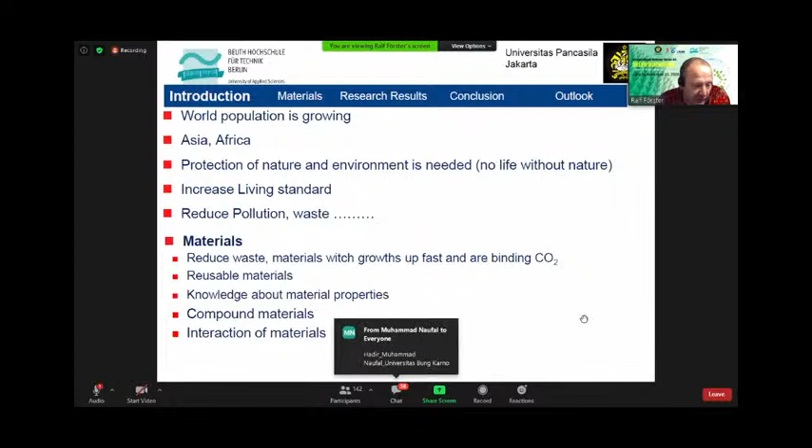So we need other construction materials. We need some alternative building materials, as you know, the sand for mixing concrete to building beton is decreasing. The prices for this material is increasing very fast. One of our alternatives are wood.

In Europe, wood is well known as a material for houses, for devices, and so on. Everybody knows this. In Asia, bamboo is well known as a traditional material with very interesting material properties. But we need some new technologies for using bamboo, like joining technologies and so on. We have investigated in the last year the friction welding process on bamboo and wood too, and I will tell you something about our results and our ideas of new materials.

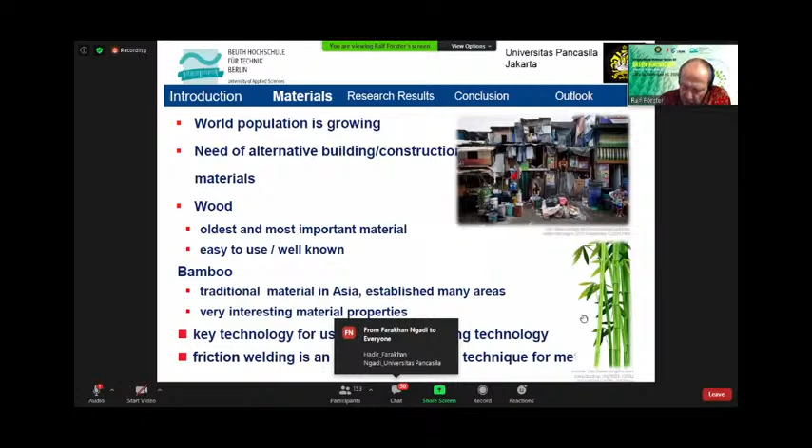Yes, all of you know bamboo much better than the Europeans. The structure of bamboo is similar to wood, and the basic properties are also similar, but bamboo is a member of the grass family. It's not a wood, it's a grass. There is a hard outside and a soft inside. It's very tear resistant fiber strands, and most bamboos are divided by knots, and the tensile strength of the bamboo grass reaches values up to 40 kilonewton per square centimeter.

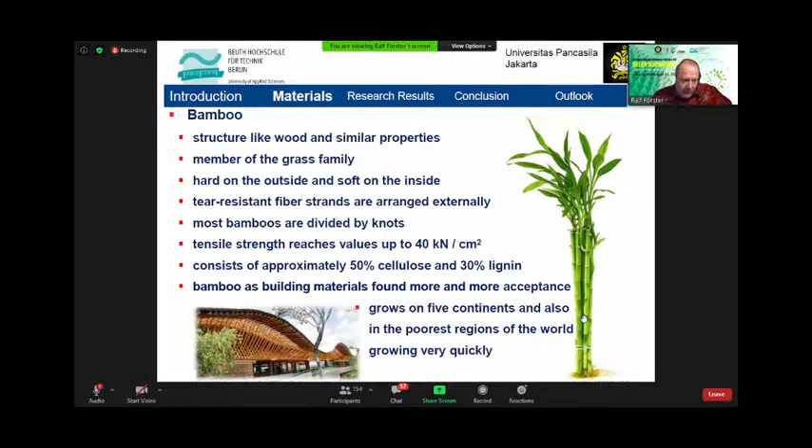The main content of bamboo is cellulose and lignin. This is also similar to wood. Very interesting and very important for the connection of bamboo with the friction welding process is the content of lignin. The lignin content in the bamboo plant is similar to wood, and that's why we can use the experience in friction welding of bamboo also for the friction welding of wood.

So here are different pictures, cross-sections of bamboo, of different bamboo types. You know, there are a lot of different types and a lot of variety of bamboo. Here are the knots. It's a cross-section of a bamboo stem with the knots and the hard outside and the empty inside with very stiff knots.

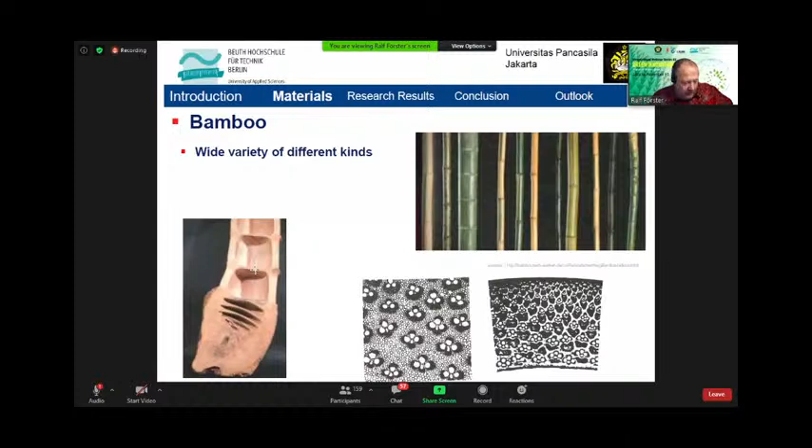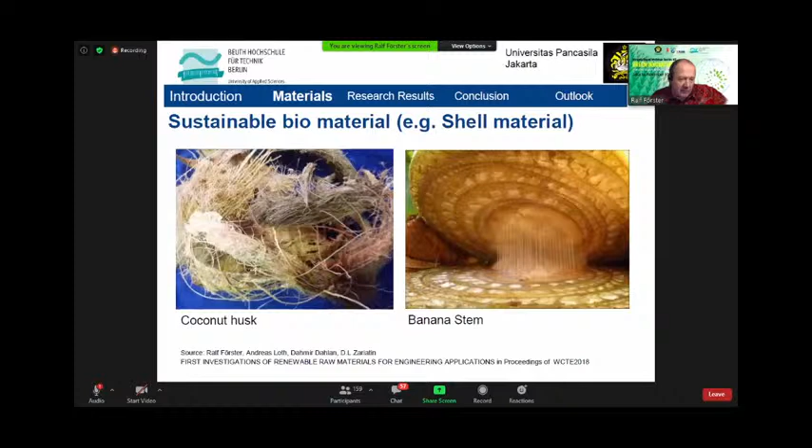So what are other sustainable, very interesting biomaterials like coconut husk, banana stem, banana ropes, palm tree fibers? Those are biofibers. These are very interesting for the next step, for outside material of sandwich materials, lightweight sandwich materials, like hemp fibers, linen fibers, and so on. There are a lot of ideas and opportunities to use such materials from a bamboo system.

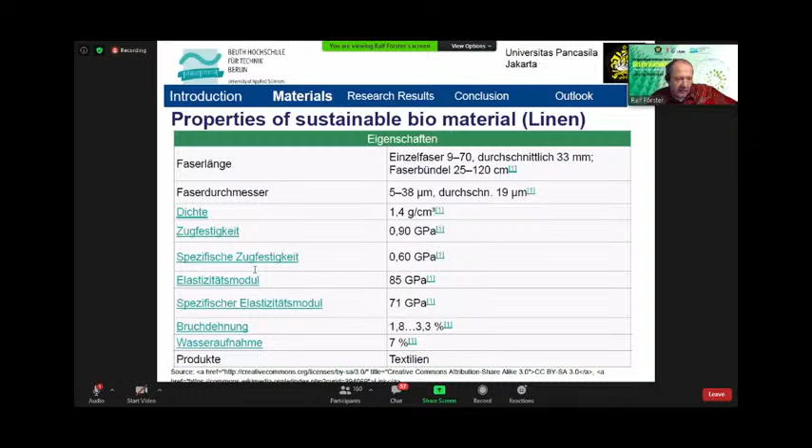We have some properties of such sustainable materials like linen, also for hemp. These are very often used in Germany or in Europe for ropes, for clothes, for pillows, and so on. But there are not so many applications with a technical background, with an industrial background. But the advantage of the biomaterials is that after using, at the end of use, there is no hazardous waste. They have no negative influence on the environment, and we can use it independent of

our Earth. So, but we don't have such standard values. We don't know the properties of the Asian biomaterials, like banana trees, like coconut fibers, and so on. And that's why we have to do a lot of research with these materials.

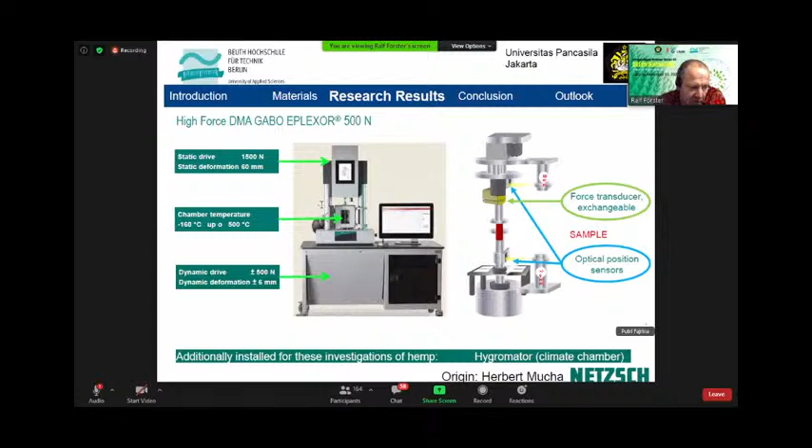Depending on the temperature, depending on the water content of our material, we can do a lot for collecting the basic knowledge about the behavior of our biomaterials for new applications. Here are some tests which we have carried out with hemp fiber. We have a constant temperature of 24 degrees and a constant humidity of 20%, and with a time sweep which increased stepwise the humidity.

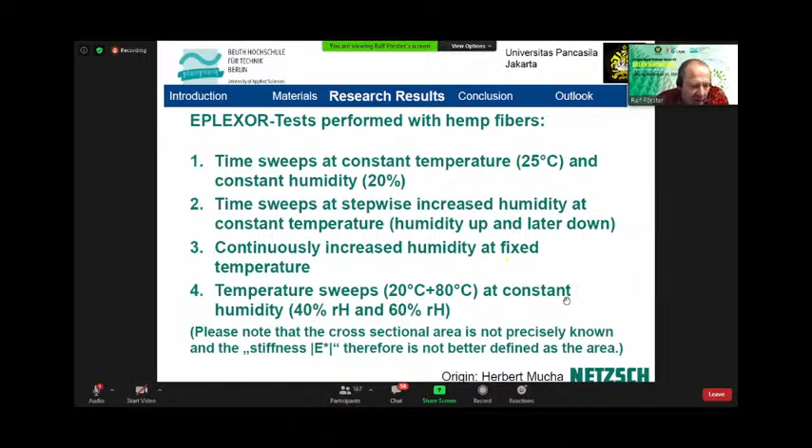The temperature sweeps between 20 and 80 degrees at two constant humidity values of 40% humidity and 60% humidity. So that we can collect first data with hemp fibers. Actually, we are trying to install new clamping systems for measuring really single fibers, very thin single fibers of our material, and we have seen how the behavior is changing over time.

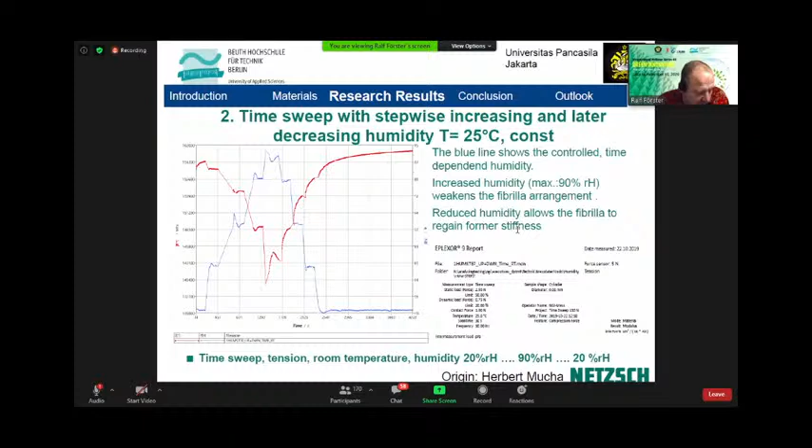Here are also some results with different humidity values and what happens with the stiffness of our material.

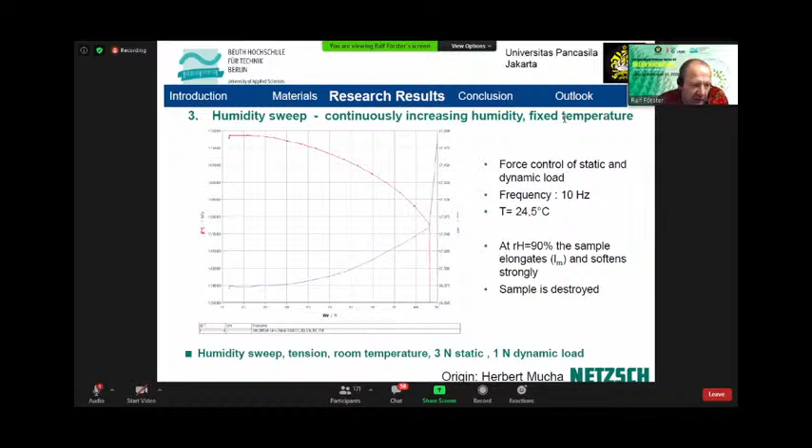Here are some other results about tension, depending on different static and dynamic loads at a fixed temperature and with continuously increasing humidity.

Here are some other results, also from one single hemp fiber. For the future we must collect much more values for different materials.

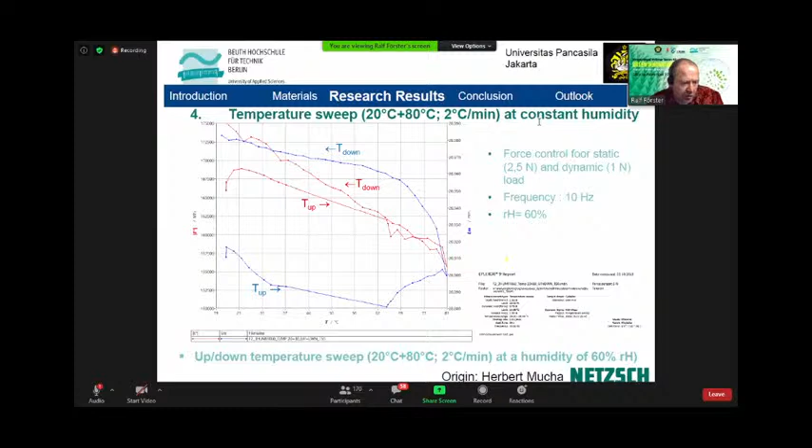And with different testing environmental conditions. What is a main problem of our research is the connection. Here are some traditional connection systems of bamboo and wood.

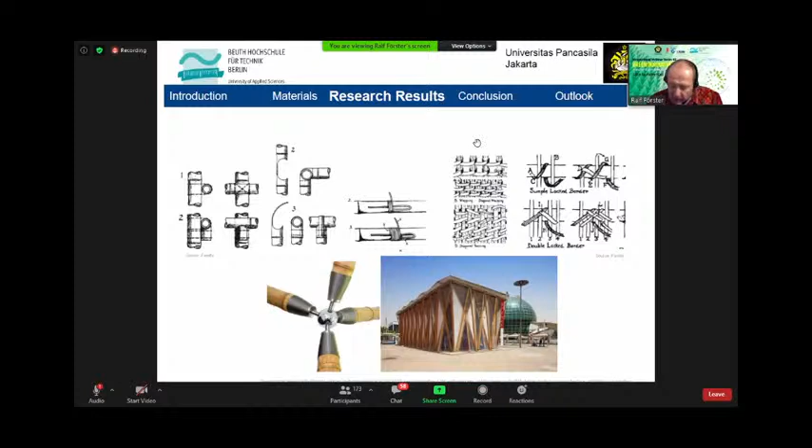We can join this with some ropes, with seals. We have metallic joinings. We can connect it with some bands, like fibers, like thicker fibers and so on.

But the demands for joining technologies are: this connection should be free of chemical glue, it should be sustainable, we don't want hazardous waste, and the connection should be reproducible.

Then one of our cylinders is fixed and the other part of our sample is turning, and with a high pressure force, temperature is increasing.

We can reach the melting point, and we can get a very stiff connection between these two parts.

After turning, we don't see any differences in our surface, and we have a very nice cylinder, a very nice shaft. This is a standard technology for friction welding.

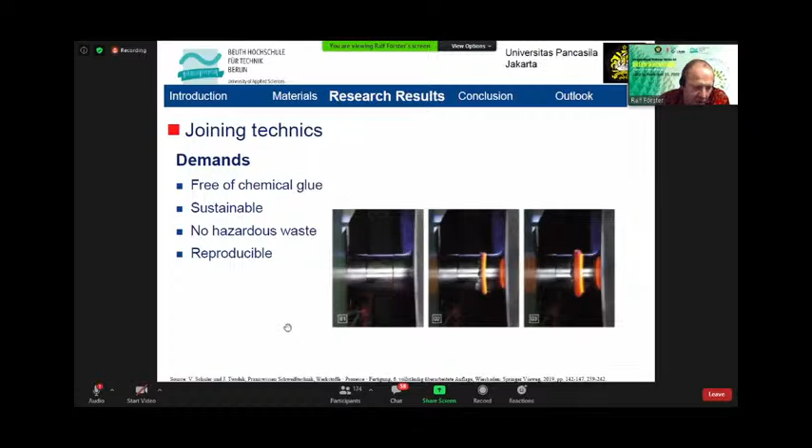Yes, it is. As you know, the Germans like it to make tables, to make standards and so on, and also the friction welding process has its own standard.

We have the welding through movement. This means there is no external heat, there is no flame, no plasma, nothing.

We have an ultrasonic welding, with some sonotrodes in this ultrasonic welding. This is very often used in the electronic industry, the semiconductor industry, like ball bonding.

Like ultrasonic bonding, if you want to connect the very thin wire of integrated circuits with the outside plating. This ultrasonic welding is used, I guess, in 99% of all joining processes in the semiconductor industry.

We also have an ultrasonic welding process in the packaging system, if we cover some very sensitive electronic devices with some sheets of plastics and so on.

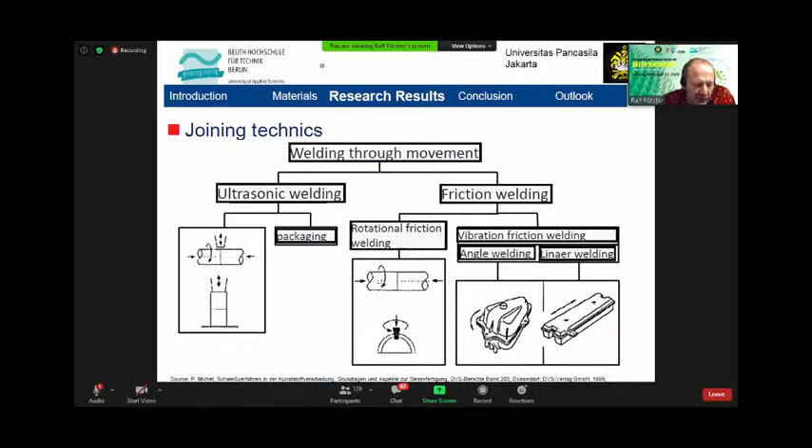Okay, and this is what we are doing. We have one fixed part and the other rotated part with a pressure force for the connection.

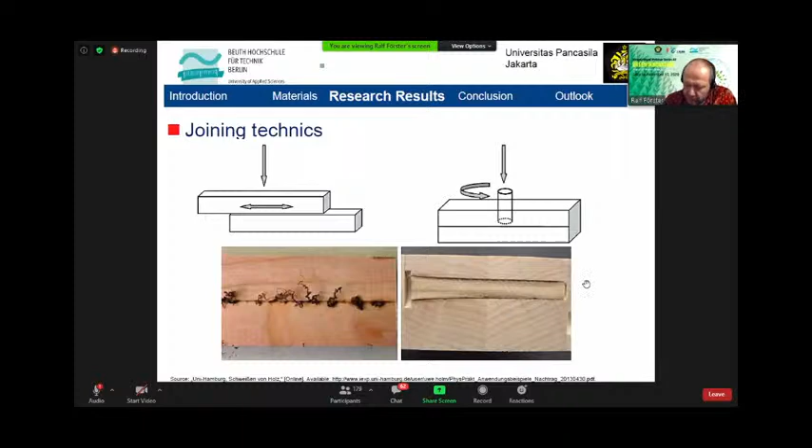What can we see when we have a cross section and look inside our friction welding zone? We have a compacted cell structure on the top, and down we have also a compacted cell structure, and in the middle, where our connection is, we have pyrolyzed mass.

That means it's a mixture of carbon and lignin, which is used as a natural glue, something like that. After high temperature without burning, we have a natural, sustainable glue, used for the connection of our different wood or bamboo types.

Some advantages of friction welding of wood and bamboo are: the connection can be established quickly within a few seconds, we don't use any additives, and we can combine different wood and bamboo materials.

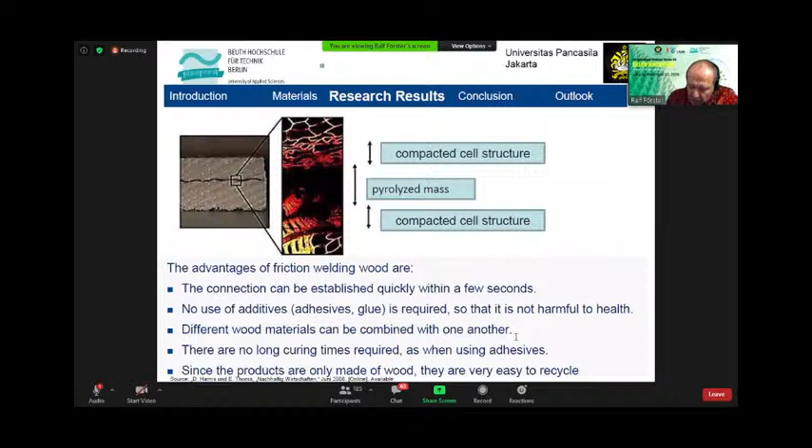We don't have any curing times compared to some used glues. And the complete product is only made of wood or bamboo without any additional materials, and that's why it's really easy to recycle. We can put it on the earth and wait some years, and we have earth again, or we can take it to a fire and eat some satay or whatever. We can use it like standard wood products, without any influence on our environment.

Two years ago, I showed you our first initial test. In 2018, we tested pine and beech with our standard turning machine. I hope you remember what we have done. I will show you our first videos about this. I hope you can see the video.

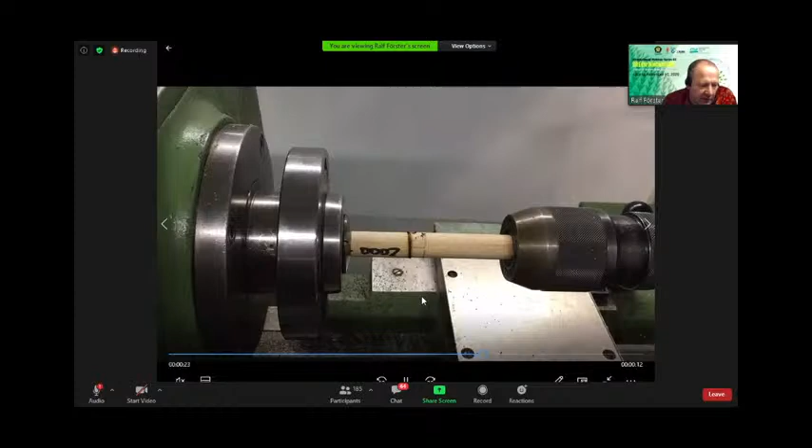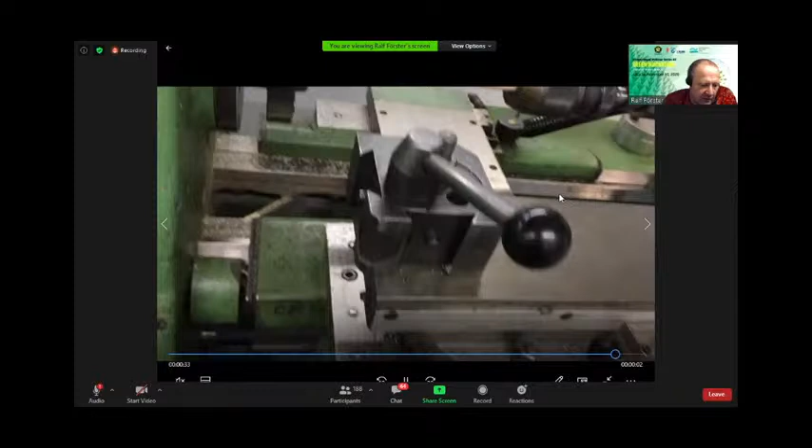Yes, we can see, Professor. Okay, that's great. That was our first test equipment, a standard turning machine. It was very easy to use. It was a fast start, but the first steps were really successful.

So this was the wood video. Here is the same procedure, same process with bamboo in a lathe.

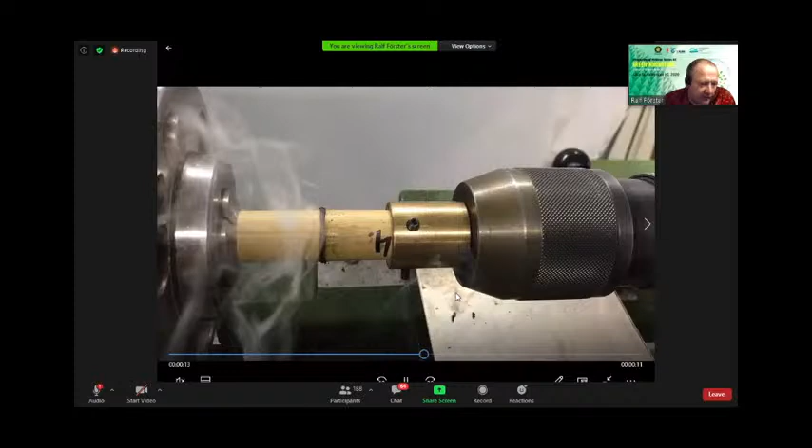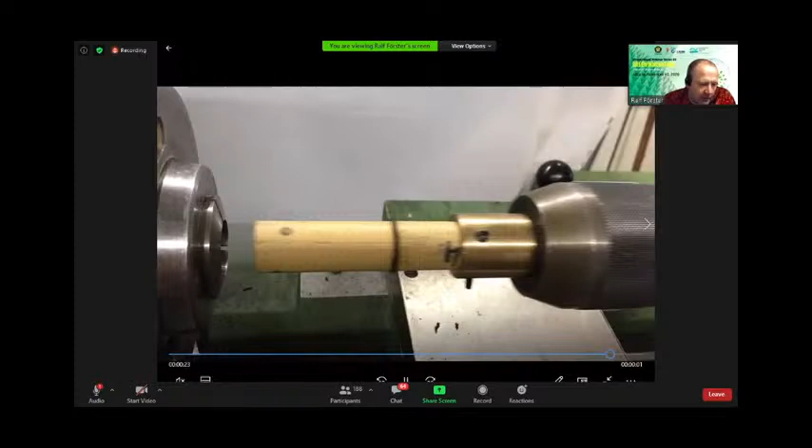We need a special clamping system for the bamboo material, but it works very well.

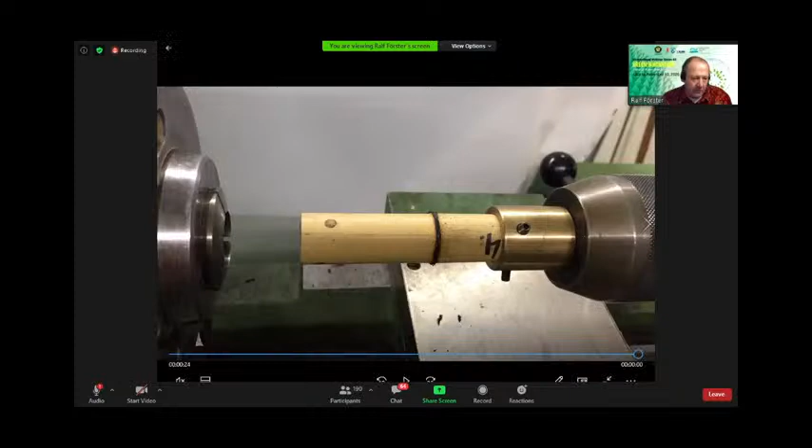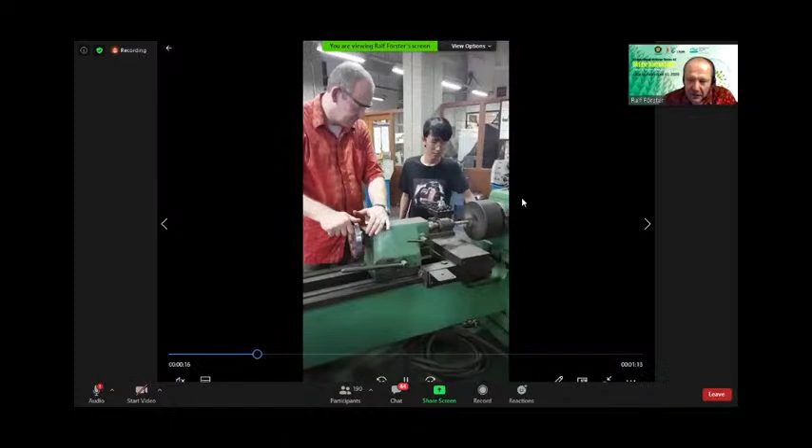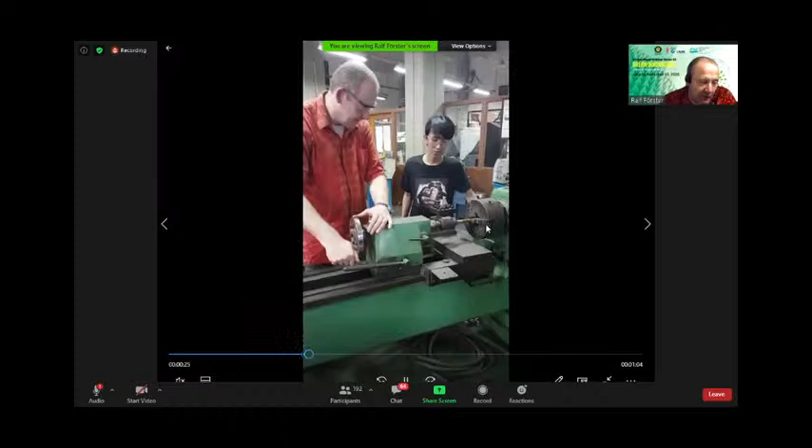And as you know, it works also in Indonesia. We carried out the same similar test at Pancasila University with original bamboo from Indonesia, and as you can see, it works in Indonesia very well too. We got the same results, and of course in Indonesia we have bamboo with a thicker diameter, and then we also have a higher stiffness and so on. As you can see, it worked in Indonesia the same way as in Germany.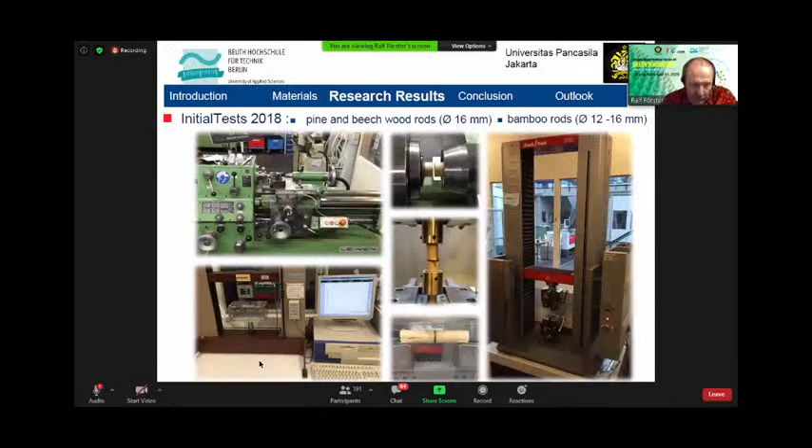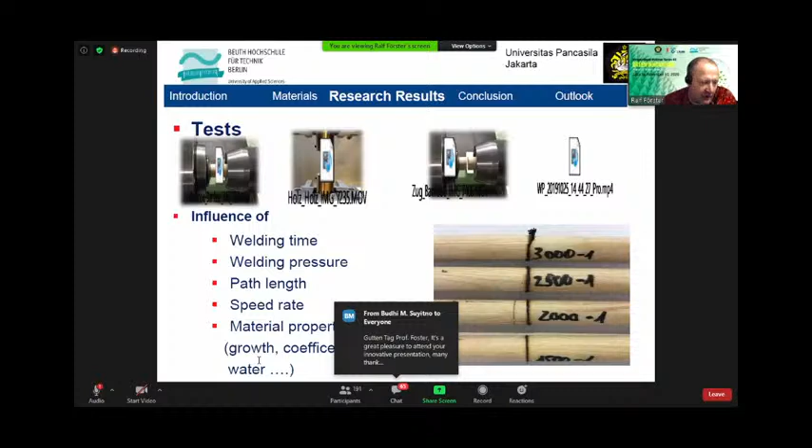That's great. That was our first steps two years ago, and we carried out a lot of tests about the welding time, welding pressure, path length, speed rate, and so on. Three-point bending tests, you know all this. But the big advantage is I got funding from the German government together with an industrial company to build up a special adapted friction welding machine, especially for wood and bamboo.

Here's a short look inside the machine. This is our clamping system for the rotational part. Here is the clamping system for the fixed part. Here is a different view. This is our turning part, and this is the fixed part of our product, and then we can combine this, and we've made a lot of tests, as you can see here in the video.

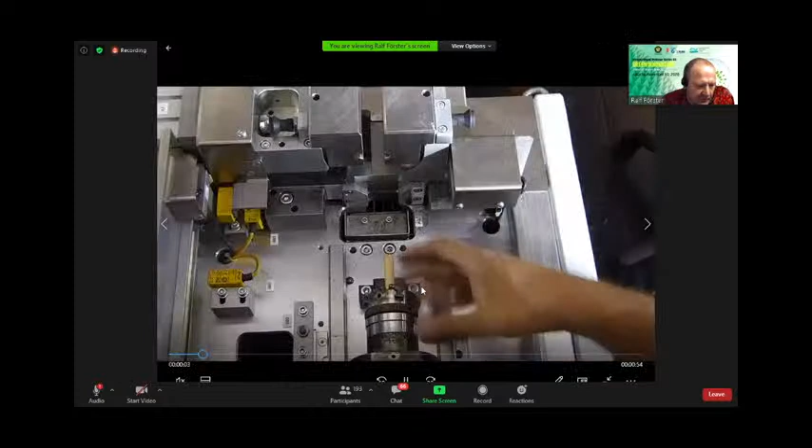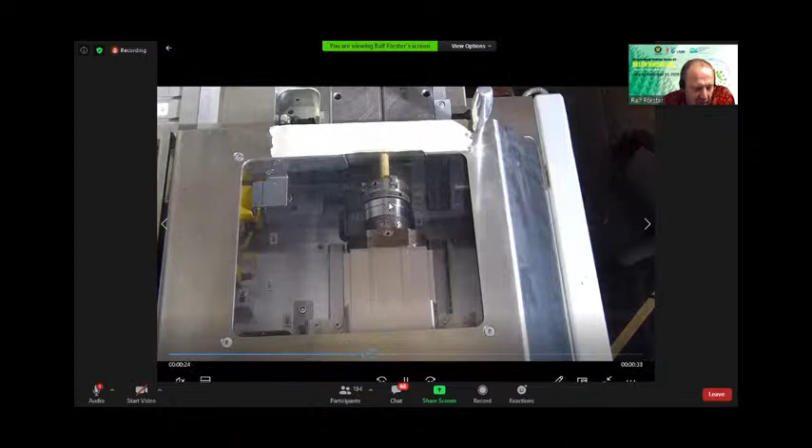This very hairy arm is my arm. We can adjust the pressure time. The system stops very fast. We can adjust different after-pressing times, and so on. We can adjust the rotational speed and so on. And as you can see, it's stiff and hard.

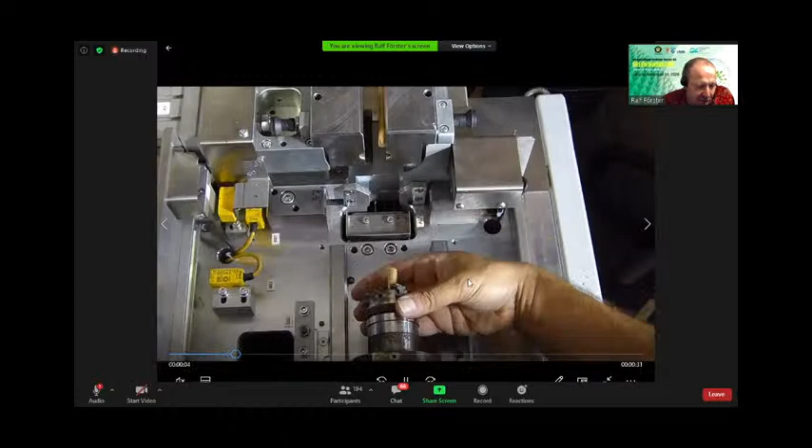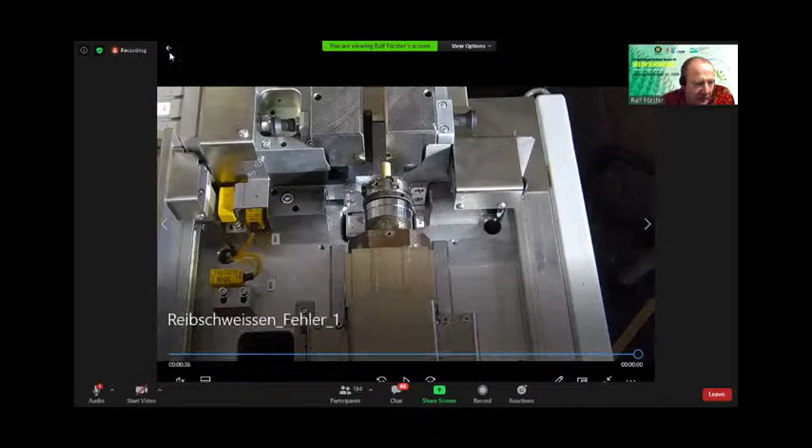Of course, not each test works well. Here's one of our failure videos. Not each project in Germany is a successful project, and not each test is a successful test. As you can see, nothing happens, no smoke, no temperature, there's nothing. The problem is the friction on both parts of the clamping system was not enough, and that's why we improved the clamping system.

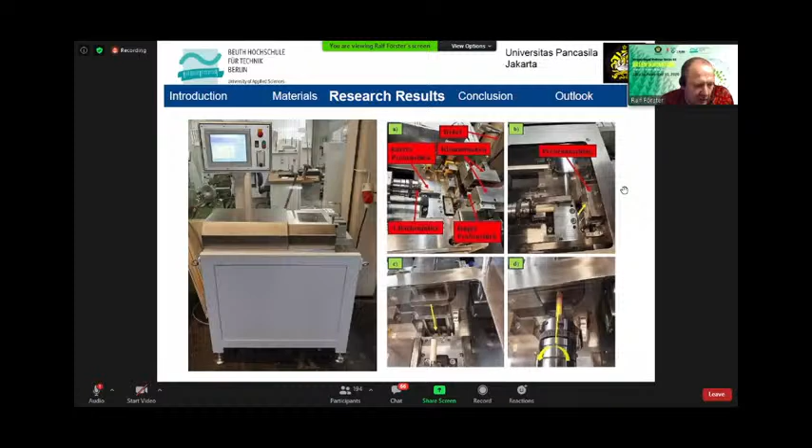These are our new equipment. We got it one year ago. That was finished, and since this time we carried out a lot of tests and created a lot of new results, and we have increased our knowledge about the process.

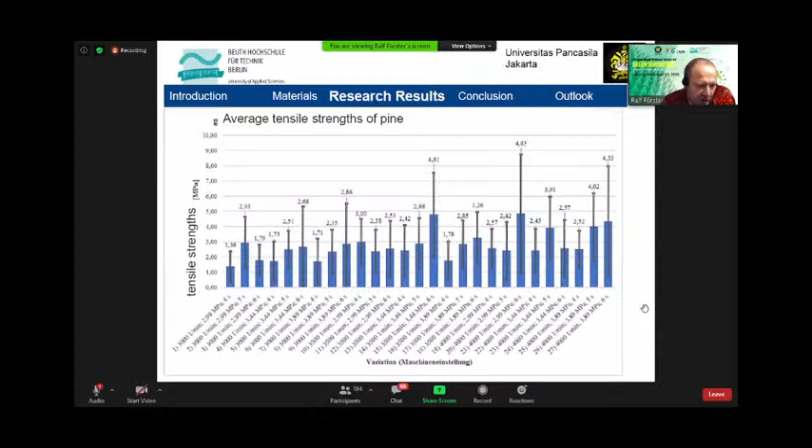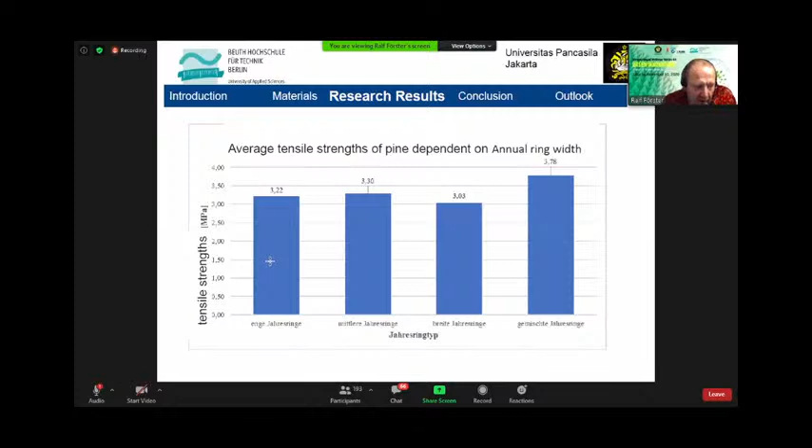What is a very interesting result, we have different results depending on the thickness of the width of the annual ring of the wood. This is not independent from the structure of the wood. That's a very interesting result, that we have an influence of the inner structure depending on the ring width in the wood structure. So here can you see?

Also here is a pine, and as you can see, these are the different wood annual rings in the wood structure, and this is also like a gluing connection, an additional joining connection. With pine, in most of the samples, it's a problem, an influence of the pine wood. When we look at the beech wood, we don't see such behavior. That's a really different difference in the wood material, and as you can see, the tensile strength of pine is 2 times higher than that of beech.

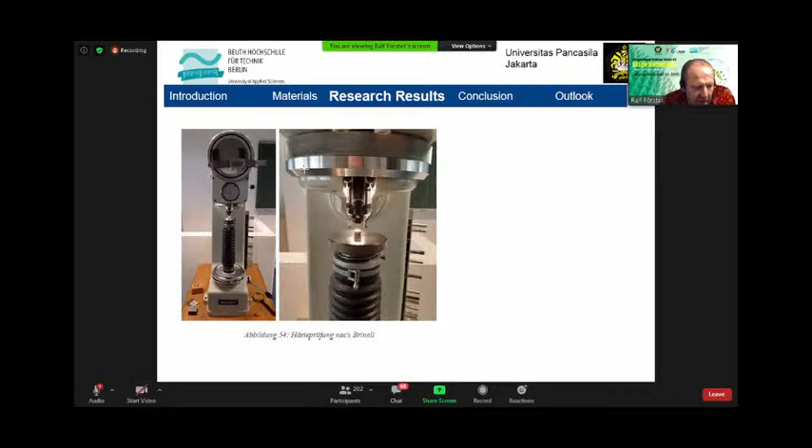What was another effect? We tried to test the hardness of the single annual rings, and that was really interesting. We have early wood, which is much softer than the late wood, so you can imagine we have different friction properties and different pressure forces on this material. This is a piece of one natural growth beech wood with really different hardness values. This is hardness of Brinell, and here are also the diameters of the beech compared to the early wood and the late wood.

In Germany, it's sometimes also called summer and winter wood. I don't know, maybe there's similar behavior in Asia, Indonesia, but I'm not sure about this. But this is really interesting result, that we have seen such an influence.

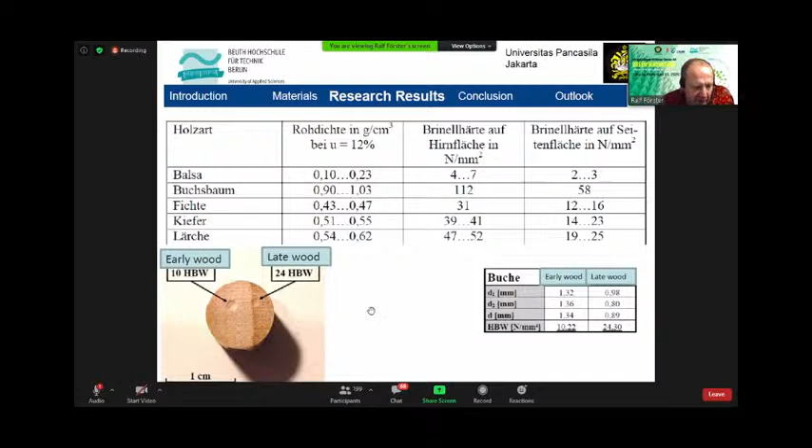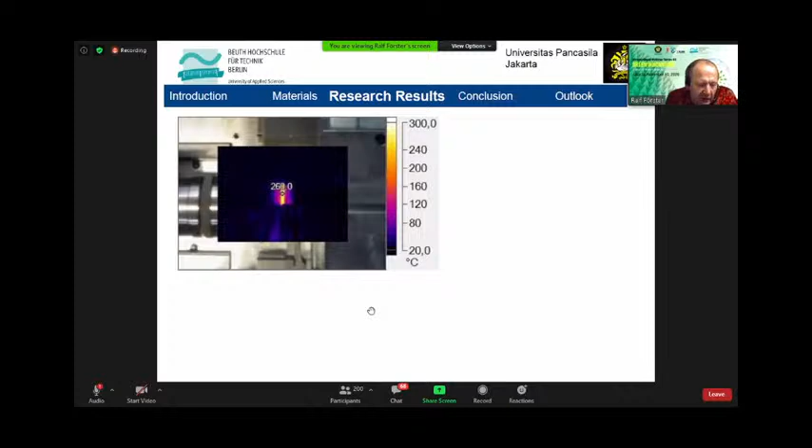Here are some pictures with a thermography camera. We need temperatures in the range of 300 degrees, and we could see this with an infrared camera. We also have a computer tomography system, and here you can see the welding area.

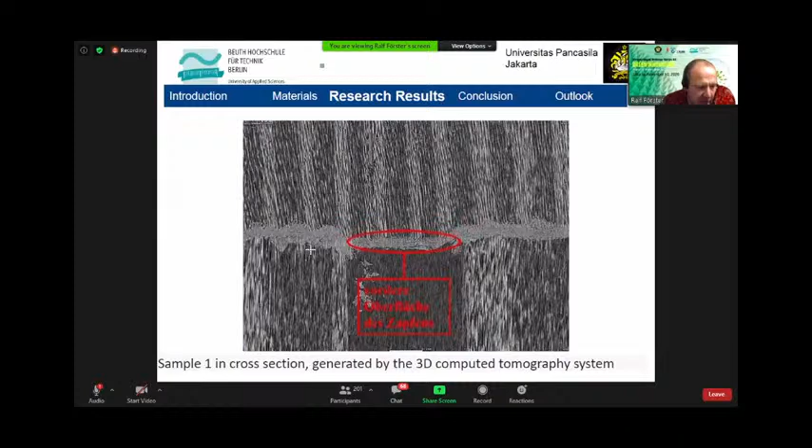Here are the different wood types, the different wood structures. These are similar to the different density of the annual rings in the structure, and that's why we find different behavior. As you can see in this picture, here is the borehole inside, in the middle of our test equipment, and you can see how it works and how it connects in this welding zone area.

Here's a similar different sample, sample 3, and here are similar welding zones. It's comparable to the other pictures, but the structure of the ground material is a little bit different.

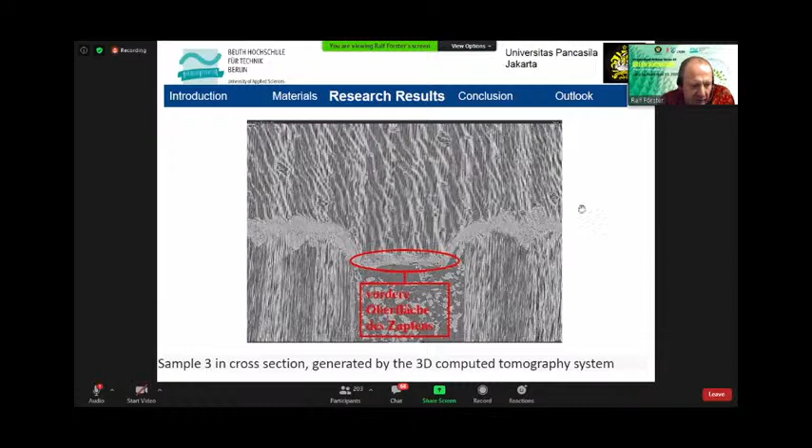Okay, what we've done too: we compared the friction, the tensile strength which we reach with friction welding. The average value was 3.3 megapascal.

When we use different glues like Ponal X-press after 8 minutes, after 13 hours, Ponal water glue, and also Ottocoll - these are German trade names, I guess I brought similar glues to Pancasila about a year ago, you can use this glue too - we found that with the friction welding process we don't get the same values, but 50% of these values, without any additional chemicals, without any hazardous materials. This is a value which is acceptable for the wood industry, for skilled workers and so on, and our cooperation partner says, okay, that's fine, we can work with such a process.

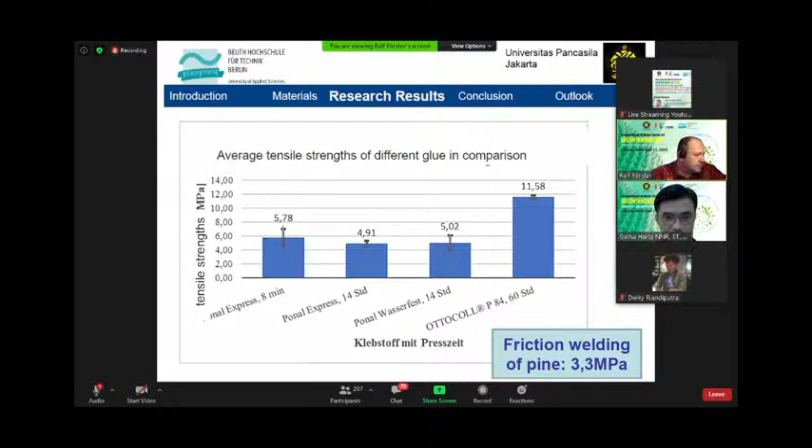I will try to find some examples, as I'm searching some.

Sorry, I cannot find it. We have different standards, like 3-point bending test, tensile test, and so on, like hardness tests. I'm so sorry, I can't find them right now, but I can send you some test standards.

Okay, Prof, we can proceed. Yeah, that's a standard test described in German industrial norms, industrial standards. Okay, Prof, we can proceed with his next question. Yeah, okay, I guess that's better.

His second question is: what is the biggest challenge in producing or manufacturing the component or part using such kind of materials?

The main problem is to find out the medium values and to calculate these structures, because the materials are naturally grown with some mistakes, some interruptions, some fiber breaks and so on. And as you know, each material which grows up naturally is adapted to the environment. Some woods, if they get a lot of storms and hurricanes during use, are bent and so on, and that's why it's the main problem to describe the behavior in a way that later it can be calculated very well and safely.

Okay, yes sir. The third question is: what is the current research trend in Germany, and what is the trend for the next 5 years? I think that's enough for the question.

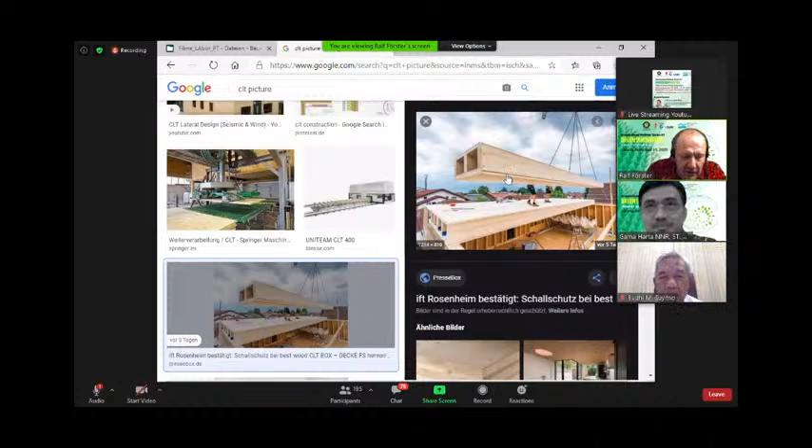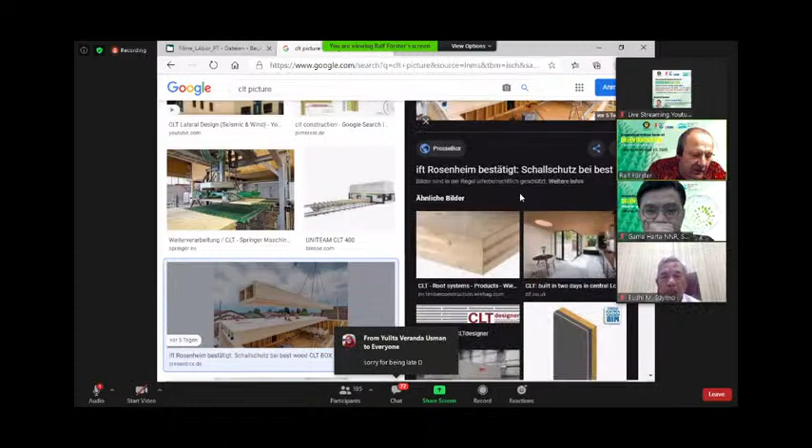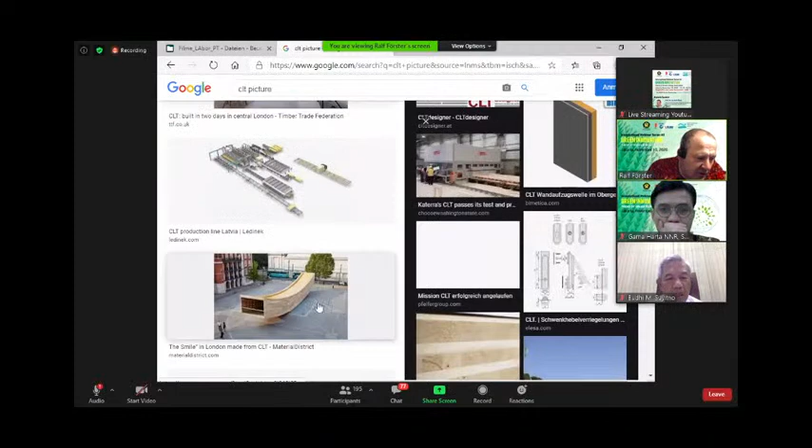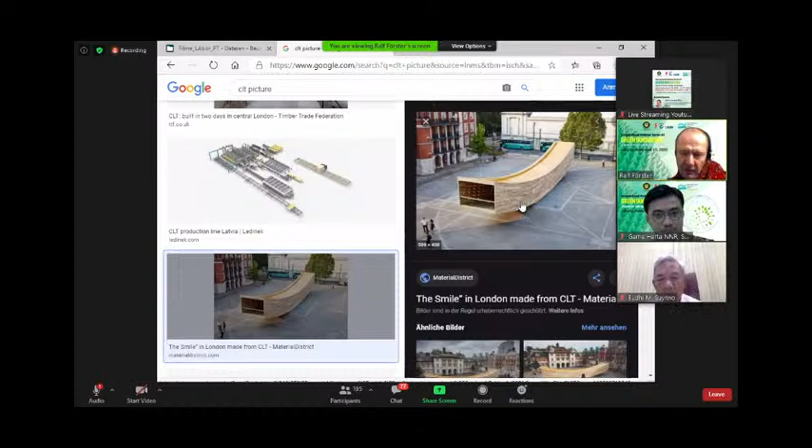This is typical CLT, cross-laminated timber material, which is much lighter than steel but with the same stiffness. There are a lot of industrial applications for very huge structures—I know some devices with a length of more than 18 meters, and you can produce a lot with this.

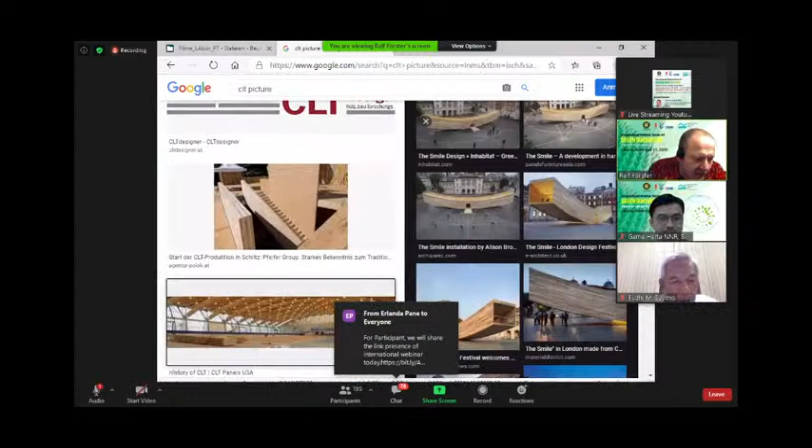Oh sorry, have you seen here—can you see this? These CLT panels are similar to an airport hall, something like that. You can use such CLT material, but you should call this CLB, cross-laminated bamboo, and use it in the same way.